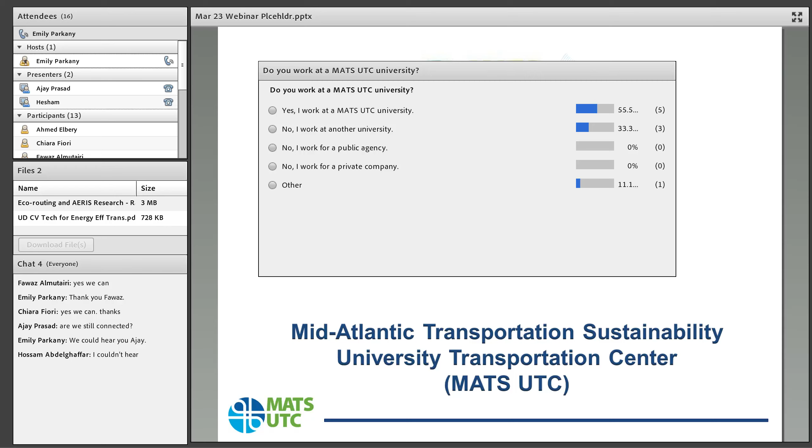So I'm going to go ahead and close that one right now and ask our final question to begin with: whether you work with connected vehicles right now. Let me make sure I'm broadcasting the results. Yes. So many of you guys are working on connected vehicle projects.

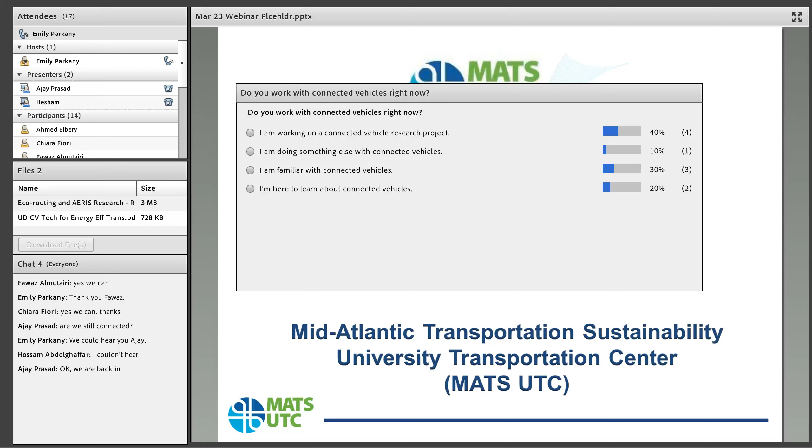So just before I hand it over to Hesham, I wanted to remind us of the other webinars in our series. Today we have our 2 presentations. Hesham from Virginia Tech is going to talk to us about network-wide impacts of eco-routes and route choice behavior and other kinds of environmental ITS applications.

And then I think it's going to be Yongqiang Wang, who goes by John, at Delaware, along with his professor, Ajay Prasad, talking to us about connected vehicle technologies for energy-efficient urban transportation and their project with fuel cell buses in Delaware, which I'm pretty excited about.

We're going to have these on the 4th Wednesday of each month. In April, we're going to have another Delaware project, which is actually a stormwater bioretention cell project, and then a project led by Virginia Tech about a bicycle and pedestrian count program to estimate performance measures in Blacksburg. So I'm excited about that.

In May, we're going to have a LiDAR for air quality measurement project, with a group of electrical engineers at Old Dominion largely working on that. And then we're going to have a UVA and Virginia Tech project in June on the impact of climate change and sea level rise on stormwater design and recurring flooding problems.

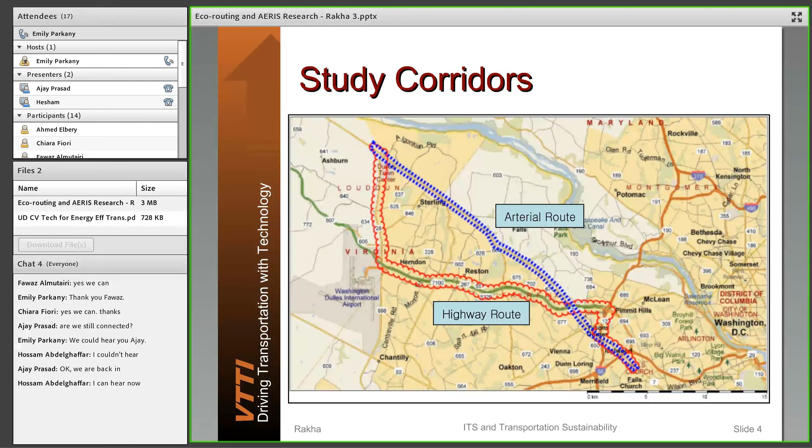So in terms of the characteristics of these routes, basically the travel time on the highway route was around 25.5 minutes. The travel time on the arterial route was about 30 minutes, so it was about 4 to 5 minutes longer to take the arterial route. And basically the standard deviation of the travel time was a bit larger on the arterial route compared to the highway route. However, if you look at the distance traveled on each of the routes, the distance on the highway route was around 22 miles. It was only 17 miles on the arterial route, so it was about 5 miles shorter if you took the arterial route.

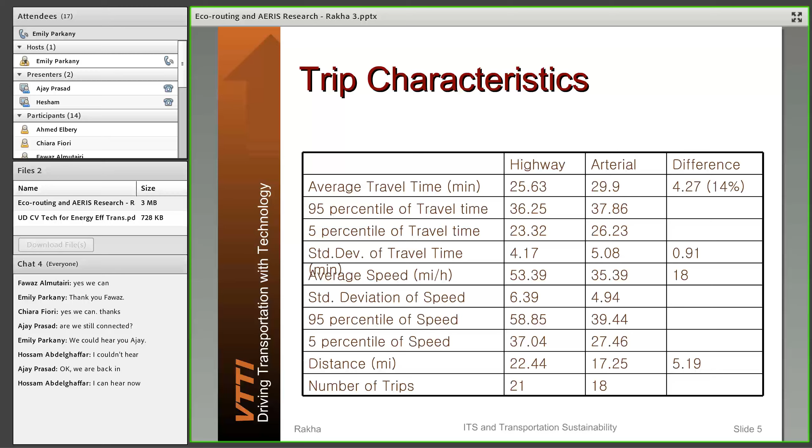What Kyoungho did was each day he would leave at the same time and basically flip a coin and decide which route to take. We had 21 realizations of the highway route and 18 realizations of the arterial route. And then using that data, we actually had a GPS unit on his vehicle which recorded second by second speeds. From that we could compute the accelerations, and then from that we could compute the fuel consumption and emission levels for each trip using the VT-Micro model, which is shown here on this slide, which is a statistical model.

It entails 32 parameters for a specific vehicle, 16 parameters when the vehicle is either accelerating or cruising, and another 16 parameters when the vehicle is decelerating. The model was developed using EPA data, and these are the description of the EPA data that we use to develop the models.

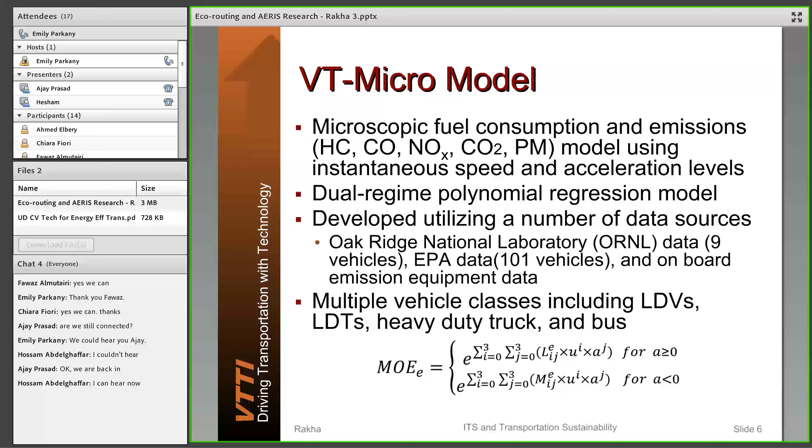So using the VT-Micro model, in order not to bias our results and remove the effect of a specific model, we actually ran it with a number of models. One of them was VT-Micro. One of them is the CMEM model, which is a model developed at UC Riverside. And both models seem to indicate that for this specific trip, you are better off using the arterial route, which was the shorter distance one, but the longer travel time route, compared to using the highway route.

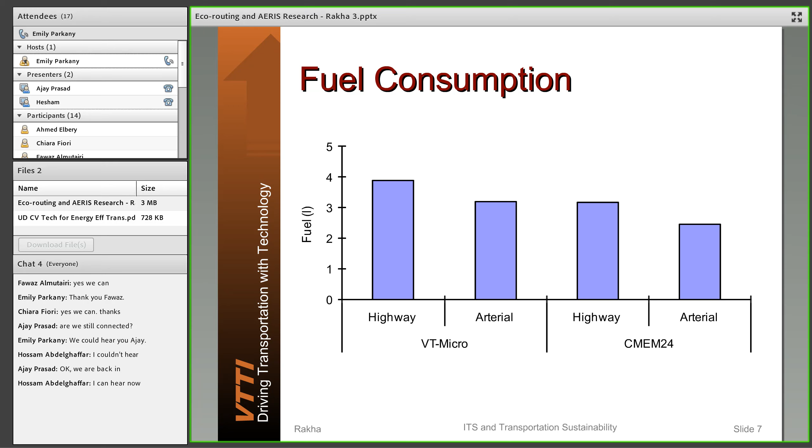The other thing that we found is that if you used MOBILE6, which is a more macroscopic model developed by EPA, it would give you the opposite conclusion. It would tell you that you are actually better off using the highway route if you're looking at HC emissions than using the arterial route. All the microscopic models, and those are VT-Micro, MOVES, which is another EPA model, and CMEM, all said the different conclusion. So based on these results, what we can conclude is that if you use a macroscopic approach, you can derive wrong conclusions because you do not capture the vehicle acceleration effects as they travel on a specific route.

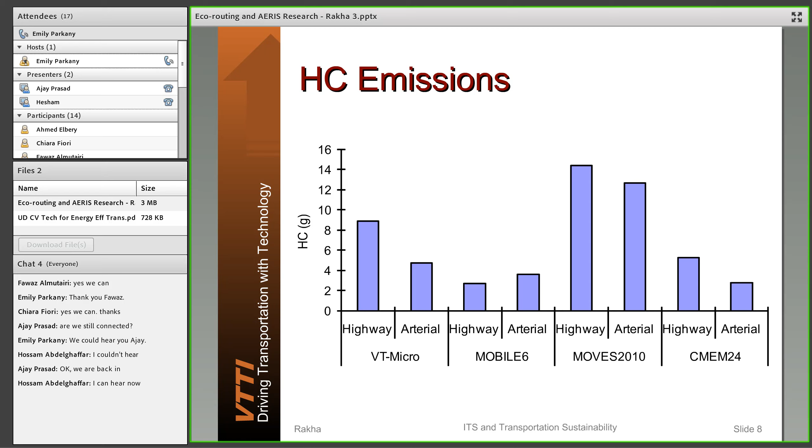The other thing that we found in this study was that if you were to rank the highest fuel consumption and emission events in descending order, so for example, if you were to choose the highest 1% of those events, those would emit 16% of the total trip HC emissions, 19% of the CO emissions, 4% of NOx emissions, 3% of CO2, and consume 4% of the fuel. And so you could then go down for maybe the top 2%, 5%, and 10%.

And basically that is telling you that if we could clip off those aggressive driving events from the driver behavior, we could actually save some significant fuel and vehicle emissions. For example, the top 10%, if we could clip those off, we could save 25% of the total trip fuel consumption. So this ties into the eco-driving. So with that in mind, then we'll jump into what we're doing here as part of the MATS project.

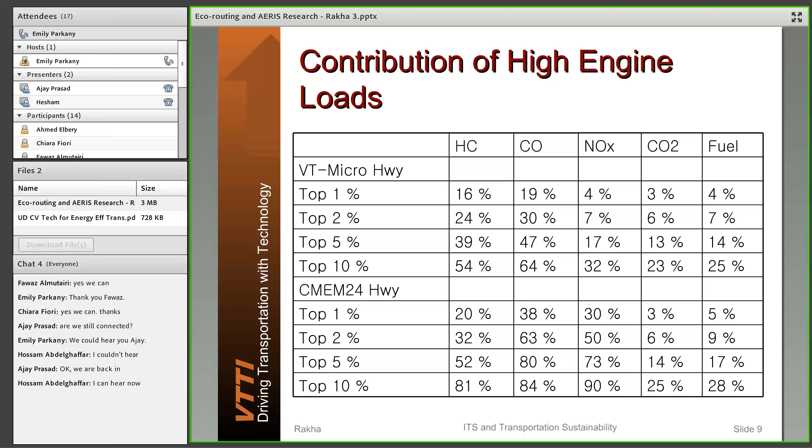So in the previous study that we did, we actually looked at just a single vehicle and how the route would affect its fuel consumption. The question becomes, what if we told now all the vehicles to use the fuel-efficient route? Could we make things worse by sending everyone on the arterial route, and then things would become worse for everyone?

And so these are some of the publications. Initially, the publications were done as part of the TranLIVE UTC, which is headed by Idaho, but then later on, Ahmed Elbery, who's actually on the line, he's a PhD student, extended the work and looked at adding some communication facilities within the INTEGRATION software, and also improving on the eco-routing system using an ant colony based approach.

Okay, so to just give you a brief background of the INTEGRATION software, we have 10 different traffic assignment algorithms within the software. These vary from real-time algorithms to non-real-time, but I'll describe these in the next slide. The INTEGRATION software tracks every vehicle every decisecond, so every 1/10 of a second. So initially we compute the route that you're going to be taking from your origin to your destination. We also identify which lane you should be in, and then we compute what speed you should be traveling at, depending on how close you are to the vehicle ahead of you.

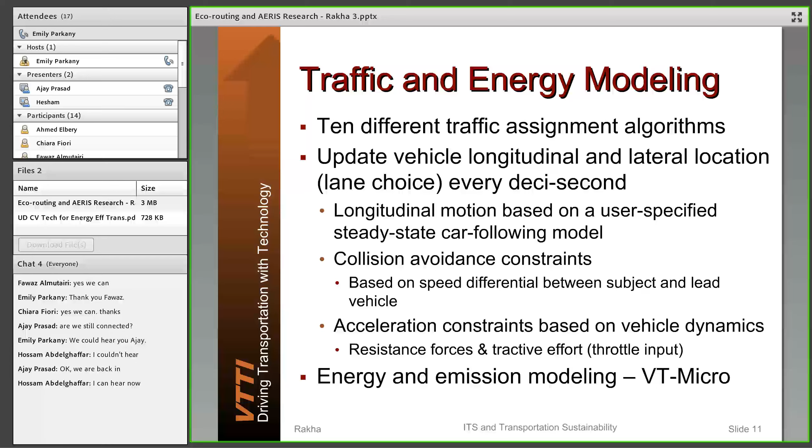In terms of the eco-routing logic that we have in the software, basically it's a feedback system that is based on vehicle connectivity. So we're assuming that vehicles have some connectivity to the TMC. That could be through some wireless communication, either cellular or Wi-Fi. When a vehicle traverses a roadway segment or a link, it reports to the TMC how much fuel it consumed on that link. That information is fused with information gathered from other vehicles that send in their information.

We do some smoothing of that data, and then the routing of future vehicles is based on the fused data that is an amalgamation of all the information that we receive from the different vehicles that can communicate with the TMC. Now this information is vehicle class specific.

So for example, if you're an HOV vehicle that uses HOV lanes, your fuel consumption is going to be different than if you were not an HOV vehicle that would use the regular lanes. And so the fuel consumed for the HOV vehicles is stored in a different matrix than would be for the SOV vehicles. The same thing could be for trucks. The same thing could be for buses and so forth.

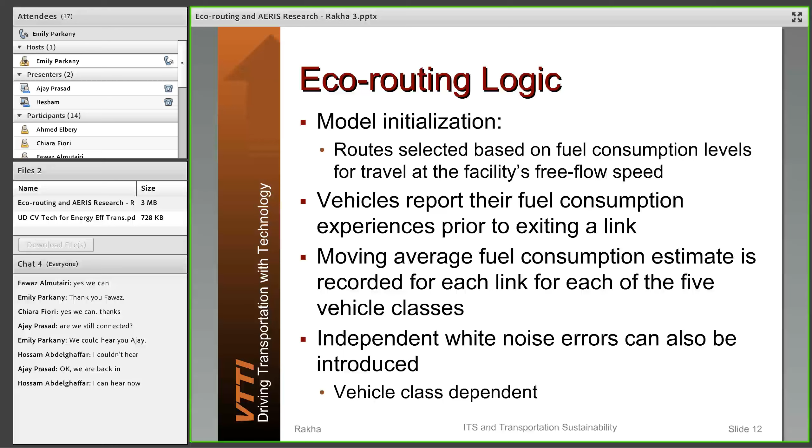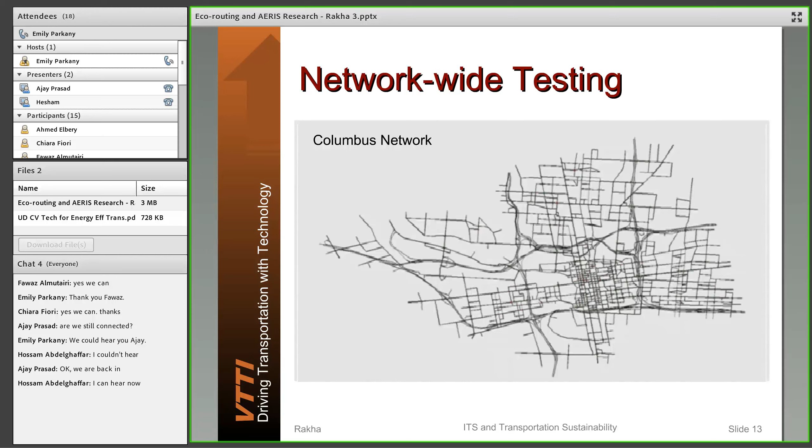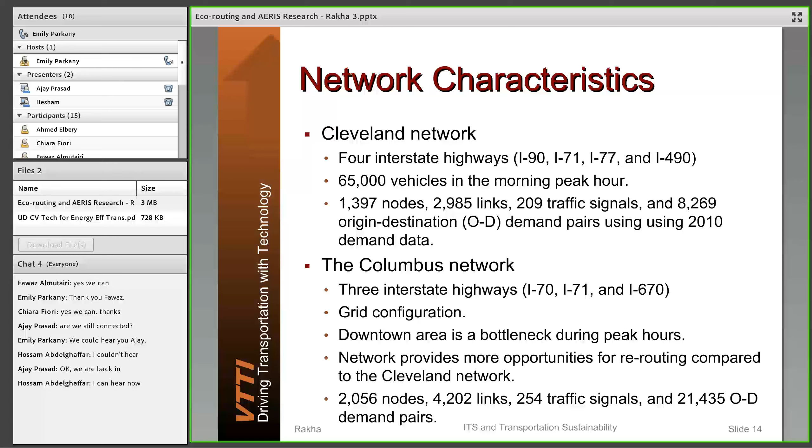And the next slide will just show you some specific information about these networks, but it will be sufficient to say that basically for the Cleveland network, we were modeling around 65,000 vehicles. This was the AM peak, 1 hour in the AM peak, and we had calibrated this network to loop detector counts using a synthetic OD estimator and using some planning ODs that we got from a planning model that they had for the network.

The results for both networks show on the x-axis here the level of market penetration of vehicles that route themselves to minimize their fuel consumption, and on the y-axis is the average fuel consumption. But the key points here are that we observed reductions in the fuel consumption of the network somewhere between 3% and 9%, with increases in the travel time somewhere between 3 to 5% when we routed the vehicles to minimize their fuel consumption. As the level of market penetration of these eco-routing vehicles increased, the fuel consumption benefits increased, which was a good conclusion.

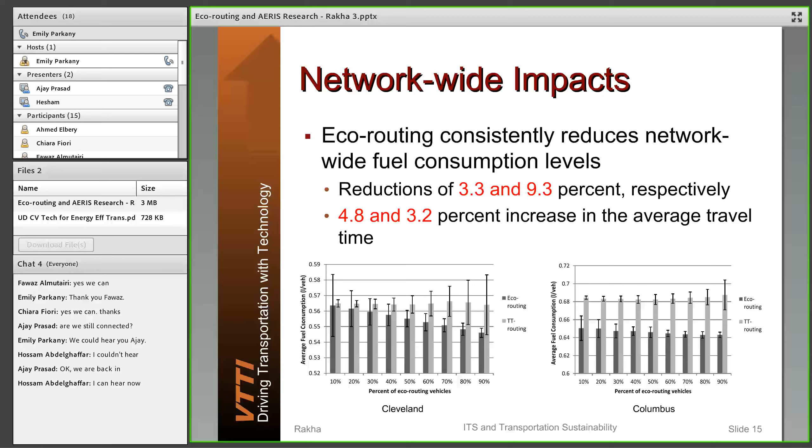And these were observed for both the Columbus network and the Cleveland network. We observed more benefits for the Columbus network, where we had more opportunities to route the vehicles because the topography of the network provided that for us. We also tested the results when we varied the level of congestion, so we increased and decreased the level of congestion. And the key finding was that for higher levels of congestion, we typically seem to observe better benefits in terms of the eco-routing system, which is a good conclusion as well.

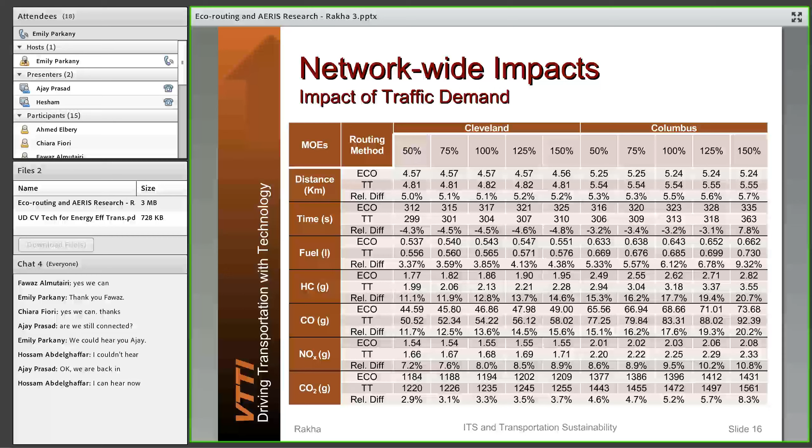We also tested the results for different vehicle types, whether they were fuel-efficient vehicles or non-fuel-efficient vehicles. And again, we found that the results were better when we were routing non-fuel-efficient vehicles.

As part of the Mid-Atlantic UTC, basically Ahmed, who's a PhD student here at Virginia Tech, extended the routing algorithm within the INTEGRATION software by developing what we call an ant colony optimization technique. And basically, in a nutshell, we enhanced the model in two ways. One of them, as I mentioned before, is that the information that we send to the TMC was only updated when a vehicle traversed the entire roadway segment. With the ant colony technique, we allowed the algorithm to update the TMC even when the vehicle was still traveling along a roadway segment and had not reached the end of that segment.

And we would project what would be the total fuel consumption on the entire segment based on how much it consumed on the portion that it traversed at that point in time, assuming that it would continue at the same rate for the entire link. And so basically using the ant colony techniques, we could actually update the information more frequently, and this becomes more critical when you have an accident, for example, on a roadway segment that basically blocks the traffic from traversing that roadway segment.

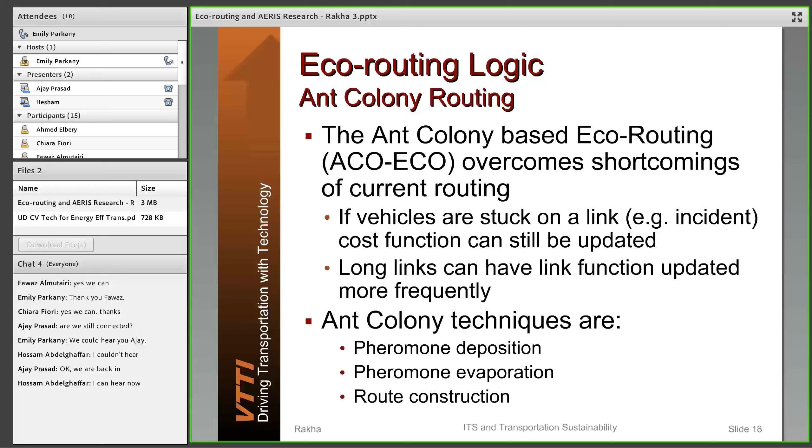In the old version of our routing algorithm, there would be no updates to the information, and so basically the vehicles would not be able to use what the other vehicles encountered up to that point in building their minimum path trees. And so with this enhancement, they could do that. And we found by comparing this enhancement to the model that we showed before, we could get savings somewhere between 2 to 6% that increased as the traffic demand increased on our network.

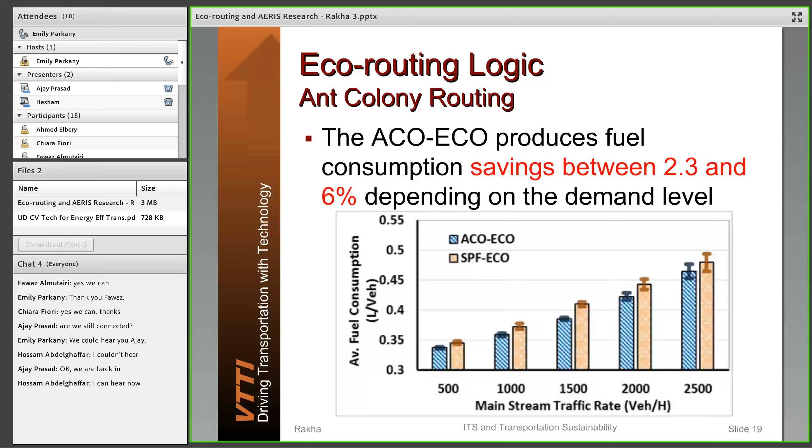Another thing that Ahmed did was he integrated the INTEGRATION software with communication software. So in the INTEGRATION software, we assume that if a vehicle wants to communicate with the TMC, there are no bottlenecks in the communication system, there is no loss of packets of the information between the vehicle and the TMC,

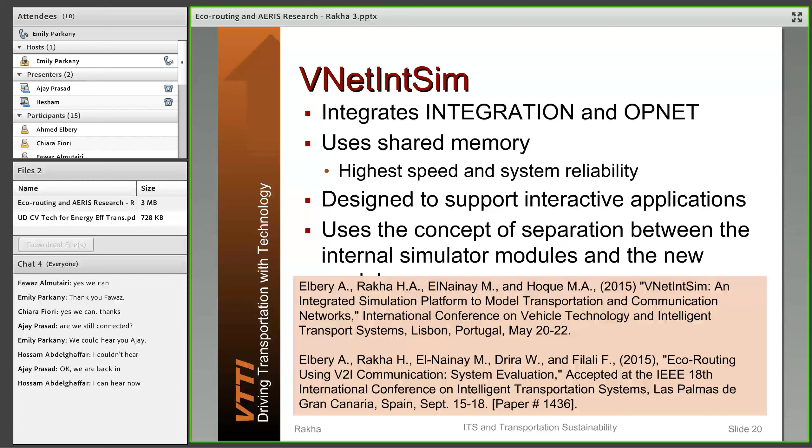and so we tried to get a realistic modeling by using the OPNET communication software and integrating that with INTEGRATION software, and then capturing any losses of packets that would occur when you have a lot of packets being sent between the vehicle and the TMC, and any delays in the communication system that would occur when you have congestion in the communication network.

That would delay the information that gets sent to the TMC, and so then the TMC would only be using data that would be delayed, or if the data were lost, then it would not be using that data.

Now, the algorithm that we have is based on a feedback system rather than a predictive system. So basically, you build a route from your origin to a destination, and then as you travel along that route, if traffic conditions change, we could reroute you at any decision point along that route.

Another thing that we could do is predict what the traffic conditions would be into the future, and that is some of the work that Dr. Mecit Cetin at ODU is working on, coming up with predictive algorithms. He's using probe data to predict what the future conditions of the network would be, and these are some of the initial results that they have from ODU, but hopefully in the future we can discuss these results in more detail.

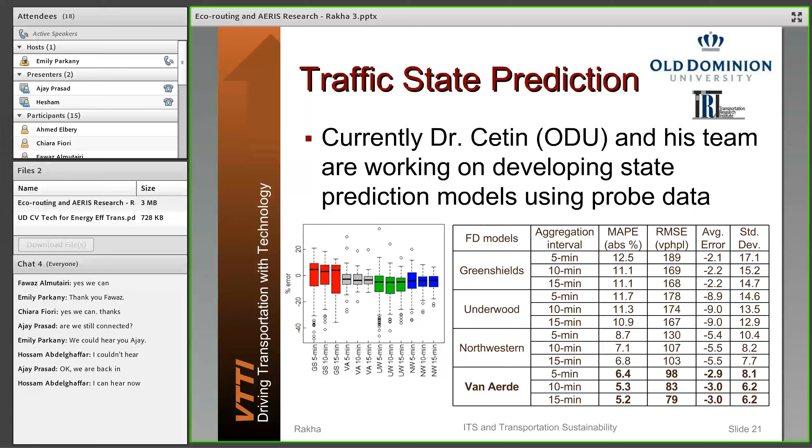So that ends the section on the eco-routing and gets into the next section, which is on the eco-cooperative adaptive cruise control systems, both on freeways and on arterials. We did, as previous work, do work on the freeways.

However, I see that I'm running out of time here, so I'm just going to maybe not describe this one very much, but just to say that basically we use a dynamic programming algorithm that looks ahead on the roadway, so it looks at the topography of the roadway. So for example, if you're driving on a roadway that has a downhill followed by an uphill, then you might speed up on the downhill to get some momentum when you're negotiating the uphill in order to minimize your fuel consumption.

The driver of this system not only inputs a desired speed, but also inputs a minimum speed that they're willing to accept and a maximum speed. And using dynamic programming, we try to find the optimum trajectory of the vehicle to minimize its fuel consumption in such a way that it is as close as possible to the desired speed and within the range of the minimum to the maximum speed.

And this is our objective function here, which is some function of the fuel consumption, some weighting that we want to be as close as possible to the reference speed, and basically we want to minimize the number of gear shifts that the vehicle has to do in order to attain that speed.

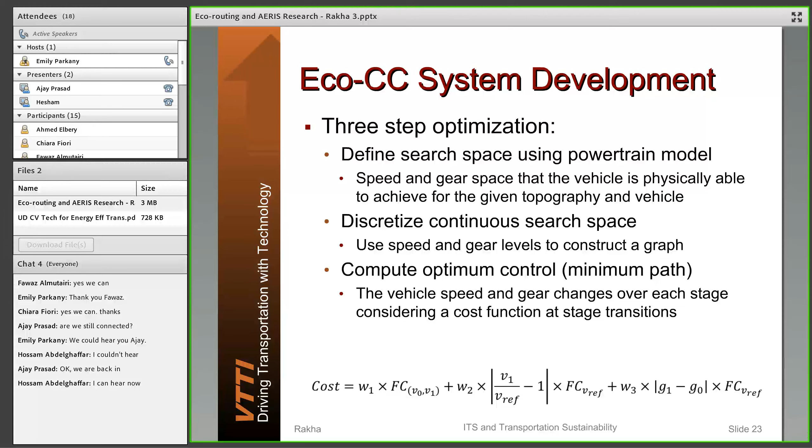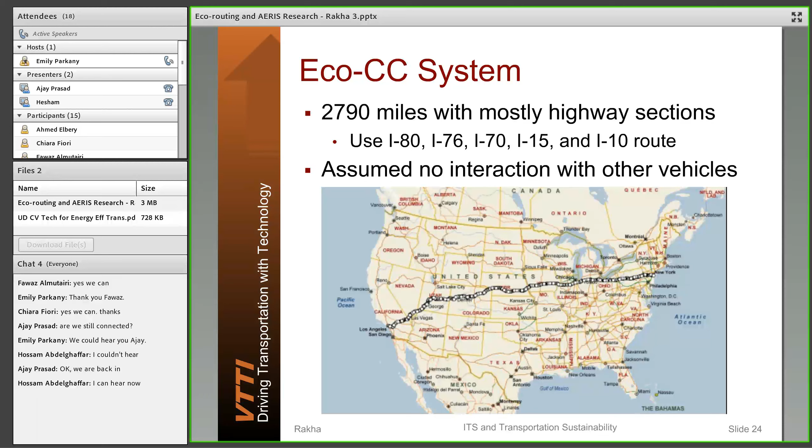We tested this on a trip from New York City all the way to Los Angeles, which is about 2,800 miles long, in MATLAB. We assumed that there were no other vehicles on the roadway, and basically we tried to minimize its fuel consumption to get from New York to Los Angeles.

We observed that we could get benefits in fuel consumption somewhere in the range of 10% if you're looking at a Toyota Camry, around 17% if you're looking at a Chevy Tahoe. However, you're going to incur additional delay and reach your destination 7% longer for the Camry versus about 8% longer for the Tahoe.

So if you want to get there on time but still minimize your fuel consumption, you can get around 5% savings of fuel consumption and arrive there on time, and around 9% savings of fuel consumption for the Chevy Tahoe, and arrive there on time.

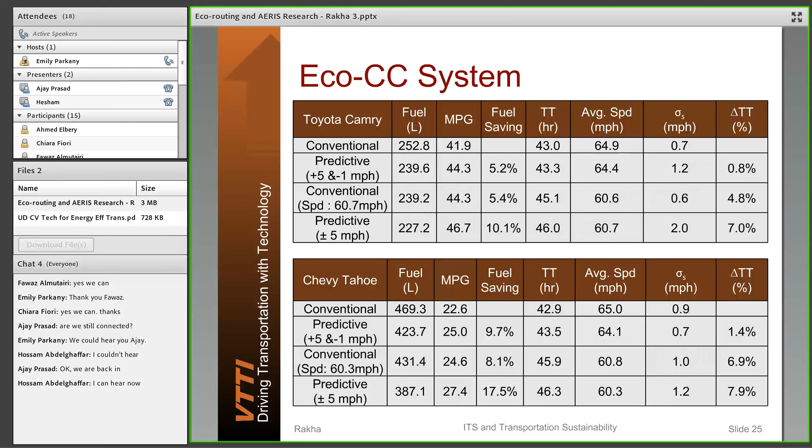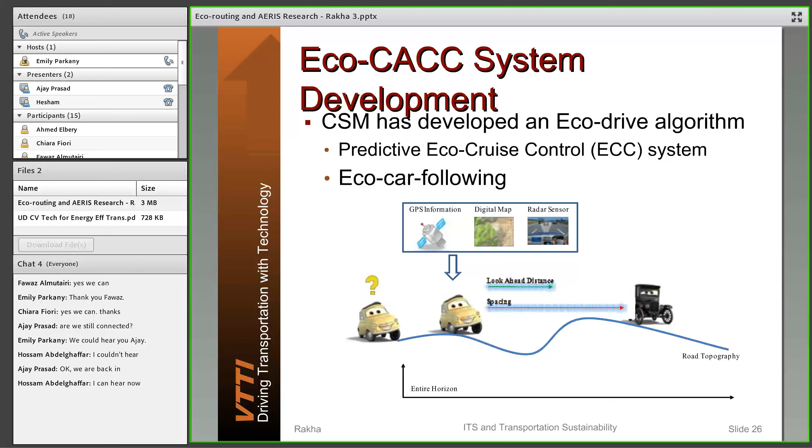Now, if you have other vehicles on the roadway, you need to also consider car following behavior, and we extended this to look at not only a cruise control system, but we made it into an adaptive cruise control system where it would actually look at the vehicle ahead of it.

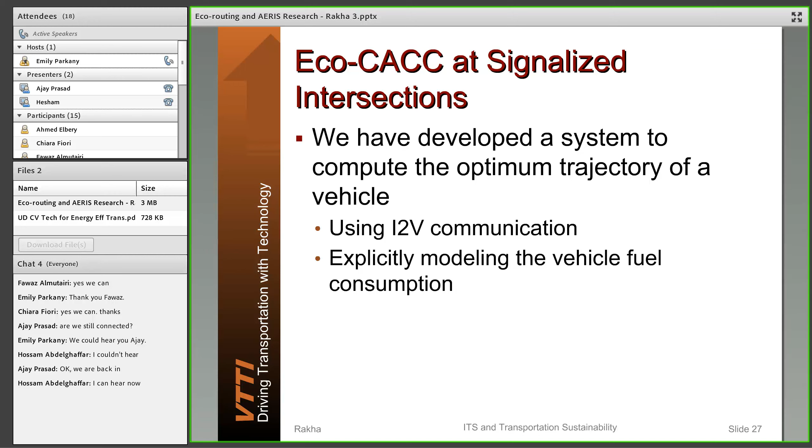Now I'll jump into the work that we're doing in terms of the Eco-Cooperative Adaptive Cruise Control System. Basically, the system that we're developing here assumes that you have some communication between the vehicle and the infrastructure. The infrastructure can inform the vehicle of what we call SPaT, which is signal phasing and timing information. We're looking at a scenario where a vehicle is arriving at a traffic signal that is red and will be turning green sometime in the near future.

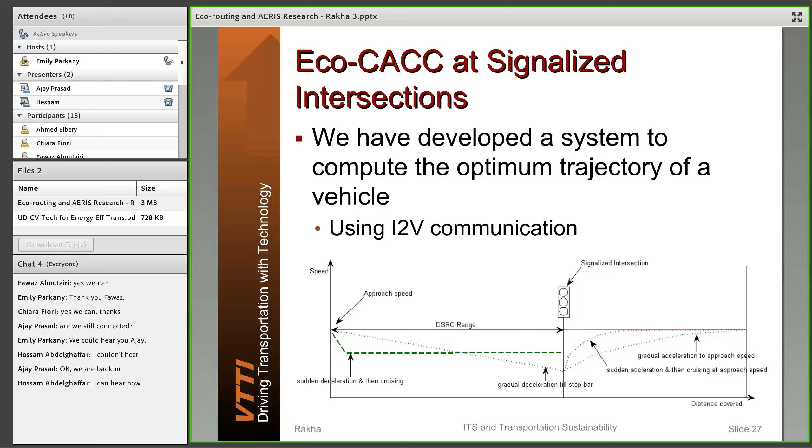And so if that controller could tell the vehicle that I'm going to be turning green in, say, 10 seconds, and if I knew that there were 3 vehicles in queue at the stop line, then I know I need to delay this vehicle by about 20 seconds. And the question that we're trying to answer is, how can we delay this vehicle in a fuel-efficient manner in order to minimize its fuel consumption?

So in this slide here, we show you the trajectory of vehicles of drivers who are uninformed, and what we want to do is change those trajectories to be these red trajectories where the vehicle would slow down upstream in order to incur the same delay, but in a fuel-efficient way so that it arrives at the stop line just as the last vehicle in queue is departing from the queue.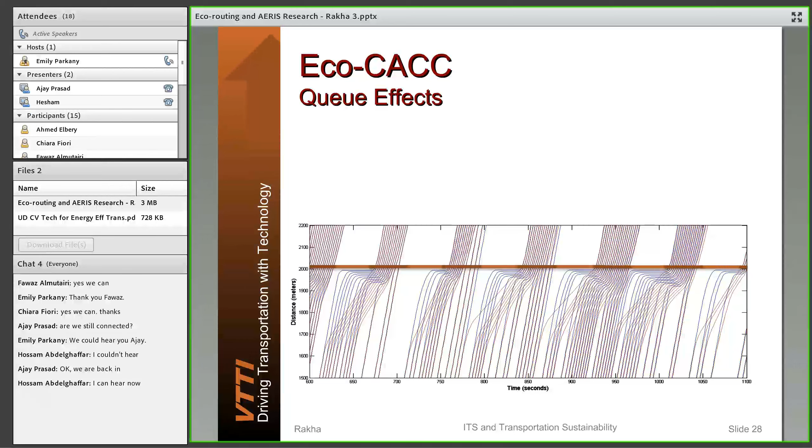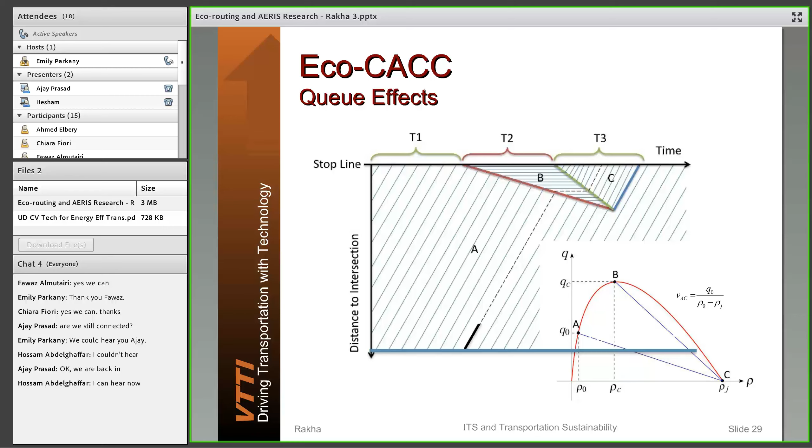And in order to do that, what we have to do is predict when the queue is going to be discharged. So we came up with techniques to estimate when the queue will be discharging in order to compute the delay that we need to delay you by in order to have you travel through the intersection in a fuel-efficient manner.

So in this slide here, we just show you the normal driving. Then we show you the Eco-Cooperative Adaptive Cruise Control driving if we do not consider the queue. And then we show you the same behavior if we were to consider the queue prediction that we developed.

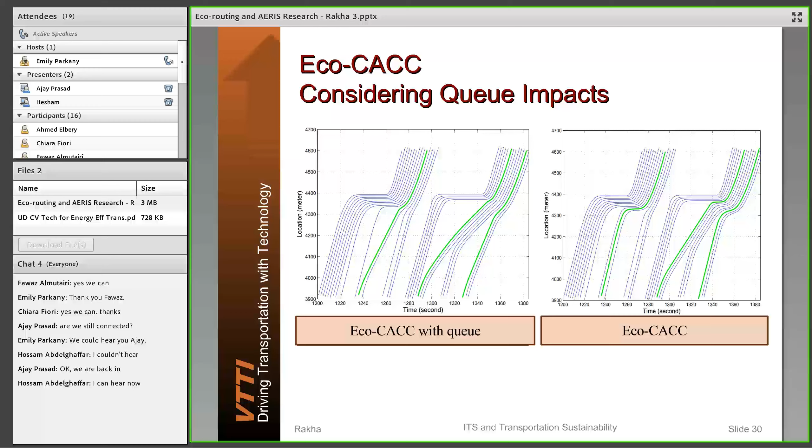The red line shows you the benefits without the queues, and then the green line shows you the benefits if you were to predict the queues. So you get better benefits if you were to incorporate the queue prediction in your model.

Now, we also tested it on a 2-lane approach, so 2 lanes in each direction. And so basically in this case, vehicles can overtake the vehicles that we are controlling. And what we found in the 2-lane approaches is that until you get a level of market penetration of around 25-26%, by having the system running, you actually get disbenefits, around 5% disbenefits in the fuel consumption.

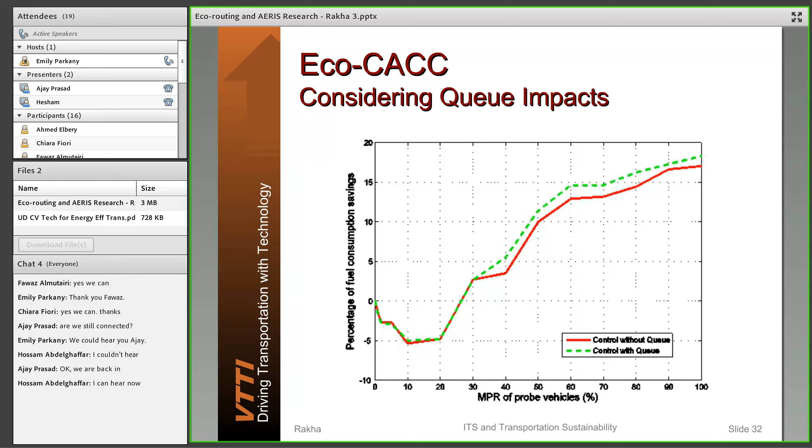And that happens because the other vehicles see the vehicle is trying to slow down and they don't understand why it's slowing down so early on. They are more aggressive drivers, and so they overtake and then cut in front of that vehicle. So overall, the system actually has higher fuel consumption levels, but then as the level of market penetration increases and the vehicles are forced to follow these Eco-CACC equipped vehicles, then you actually get benefits in your system.

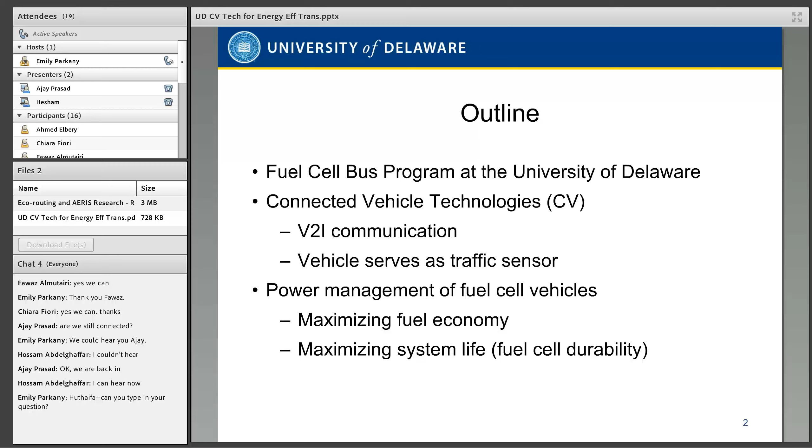Okay, so a quick introduction to our fuel cell bus program at the University of Delaware. It's an ongoing program commenced in 2005. We currently have 3 fuel cell buses on our campus, which we use to transport students from their dorms to the classrooms. Bus 1 was introduced into our fleet in 2007, Bus 2 in 2009, and Bus 3 in late last year, 2015.

The bottom right there shows our refueling station. This was built by Air Liquide, just about 5 miles away from campus. It's maintained by Air Liquide, so that's where our buses go to refuel as and when required. The hydrogen fuel tanks are in the roof of the bus. You can see the hump on top of the roof. That's where the hydrogen tanks are located. And the entire fuel cell system, if you open the back doors, you can actually see the entire system right in front of you there. I don't have a picture of it, unfortunately.

Importantly, all of these vehicles are fully equipped with all kinds of sensors, as well as a GPS tracking unit. And in real time, this information is collected by a server in our lab using a cellular link. And so we have many years of data that we have archived, and we are now using that historical data to test some of our optimization algorithms.

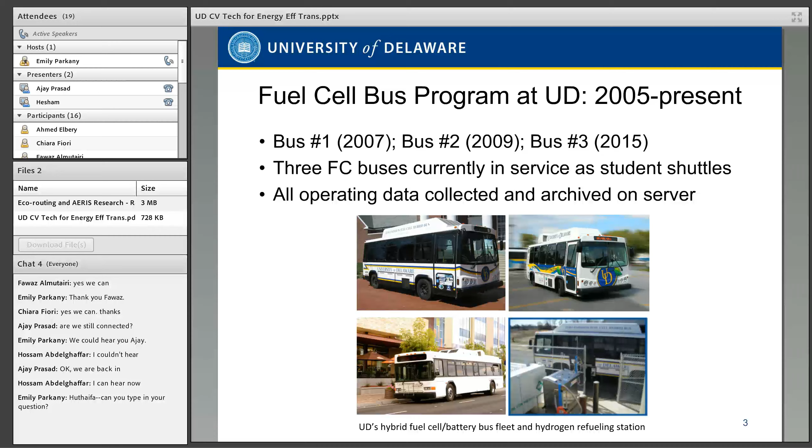Okay, so what exactly is a fuel cell? So the picture, the schematic on the right, tells you how a fuel cell works. So the fuel in this case is hydrogen. We use very high purity hydrogen as the fuel to the system. So the fuel comes in at the top left, and it undergoes an electrochemical reaction, and the excess fuel exits at the bottom left.

The electrochemical reaction is between hydrogen and oxygen. The oxygen is extracted from the air, so we supply air with an air compressor to the fuel cell stack at the top right of that picture, and as it flows, the oxygen is extracted and the excess air flows out through the bottom right.

The beauty of this entire process is there is no combustion going on here. This is not an internal combustion engine. This is not a heat engine. Therefore, the efficiency is not limited by typical Carnot cycle efficiency considerations. This is an electrochemical reaction where the chemical energy contained in the hydrogen fuel is directly converted to electrical energy, and we can use that current and that voltage to drive the traction motor on our bus.

So what is the product of the reaction between hydrogen and oxygen? It's just plain old water, and what comes out of the tailpipe of the fuel cell vehicle is just water vapor. On a cold morning, you might see water droplets, but there is no carbon dioxide, no carbon monoxide, no NOx, no SOx, no soot, nothing.

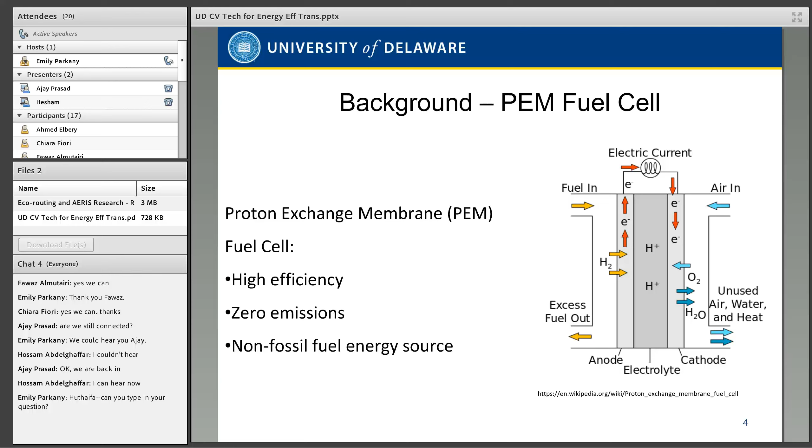So on the left there, I have a couple of bullet points about the benefits of fuel cell vehicles. Because it's not a heat engine, you get very high efficiencies, about 2 to 3 times the efficiency of a conventional gasoline or diesel powered vehicle. Also, these vehicles are zero emission because all that's coming out the tailpipe is water. And if you produce that hydrogen from a non-fossil fuel source, that's a good thing because that helps to reduce our nation's dependence on foreign petroleum.

Typically, the voltage is not sufficiently high, so we pass it through a boost converter to jump it to 300 volts or 600 volts, depending on what your system is configured for. The voltage coming out of the fuel cell is DC, whereas our traction motor is an AC induction motor, so we have to pass it through an inverter to convert DC to AC, and that's how we drive the traction motor, and that's what drives the wheels.

You'll notice there is a battery that is attached in parallel to the electric drivetrain, and what we have in our bus is a battery-dominant hybrid configuration, which means to say that the fuel cell's job is to work so as to keep the battery topped up, depending on certain rules that we employ, and it's the battery's job to actually drive the vehicles. So the fuel cell and the battery work in a combined manner to drive the vehicle.

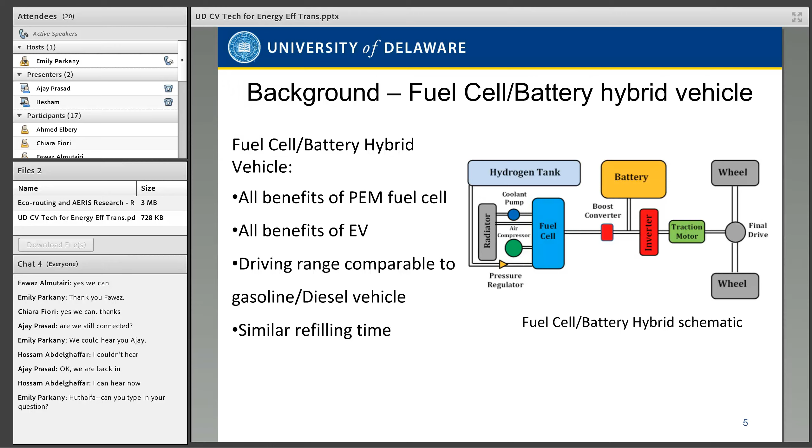So with that, I'm going to hand it over to John, and he's going to talk to you about what he's been doing in terms of his results. Okay. Hello, everyone. This is John from University of Delaware.

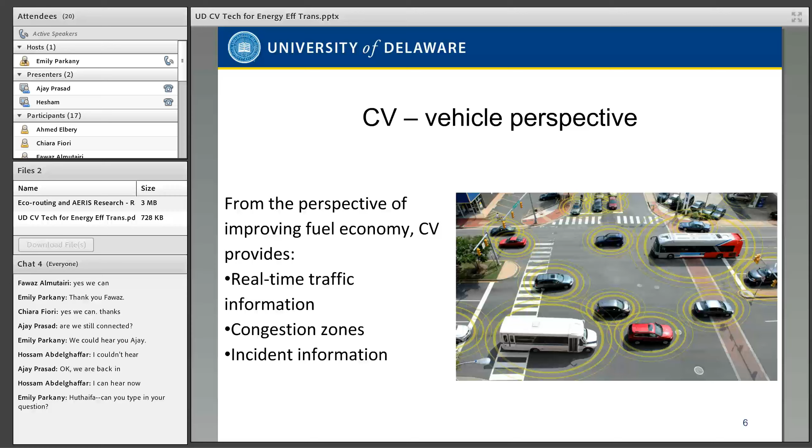So with all those connected vehicle technologies available, we have all the communication systems to get traffic information regarding congestion and incidents for the vehicle. So from the vehicle perspective, we want to use that information to improve fuel economy. And also, as we showed before, from the traffic management perspective, with those connected vehicle technologies, we can send data to the server, to the TMC.

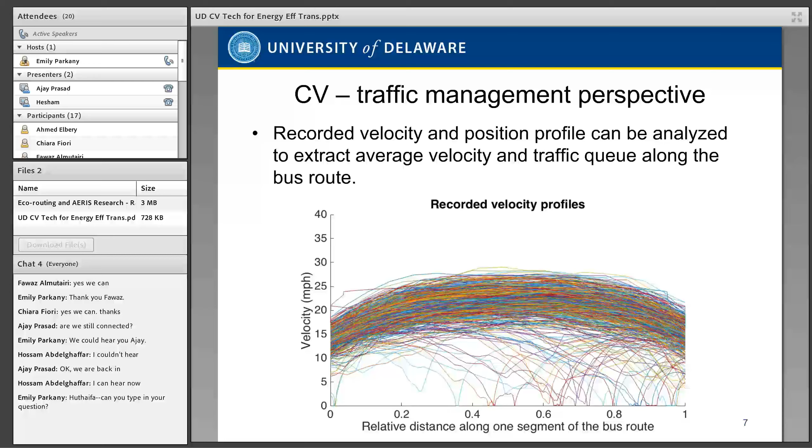So that means with our bus as a traffic sensor, we can extract all the usual information regarding traffic, such as average velocity and length of traffic queuing on the route. That information is very useful from a traffic management perspective. And then after we get all that traffic information from the TMC, how do we use it?

So for the power management on the vehicle, traditionally you only have, say, a gasoline or diesel engine. You only have one power source, and normally the fuel consumption is directly proportional to your power demand: how much you accelerate or your cruising velocity on the highway. But on our hybrid vehicle, it's much more complicated. Normally you have two or more onboard power sources. In our case, we have a fuel cell stack and a battery pack.

So to improve the system efficiency, it's not just proportional to the power demand. It also depends on the state of your power sources, such as battery state of charge or the power level from the fuel cell stack, because each power source has a different efficiency curve. So the prediction of the future workload is very useful when we are trying to maximize the fuel efficiency of the whole system. And later I'll talk about the system life for the fuel cell stack specifically.

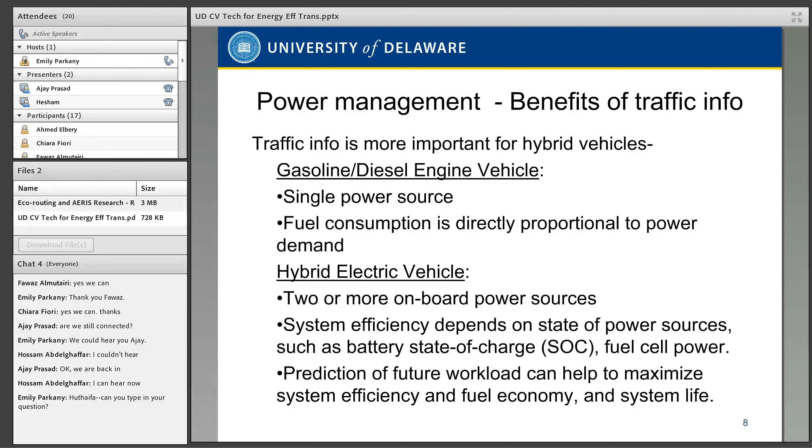So with all those parts working together, we have the framework of the control system. On the right, we have the detailed physical vehicle model. For our bus, we have a fuel cell and a battery to drive the motor. On the bottom left, we have all the information we can possibly get from the TMC, such as traffic information and geographic information, such as road elevation. That information can easily be converted to the velocity profile, including delays and slope of the road. Then it can be fed into our optimization algorithm, which will convert those velocity profiles to workload.

And normally for different vehicles, you have different optimization objectives. Traditionally for gasoline engine vehicles, you only consider fuel consumption and emissions. For the fuel cell stack, we don't have emissions, so that's good, but we do consider fuel consumption. In addition, we also have to consider durability of the fuel cell stack. Because as Dr. Prasad just said, the fuel cell stack does not like frequent on-off cycles. It puts a lot of stress on the fuel cell and decreases its lifespan. So we also add durability to the cost function as another objective.

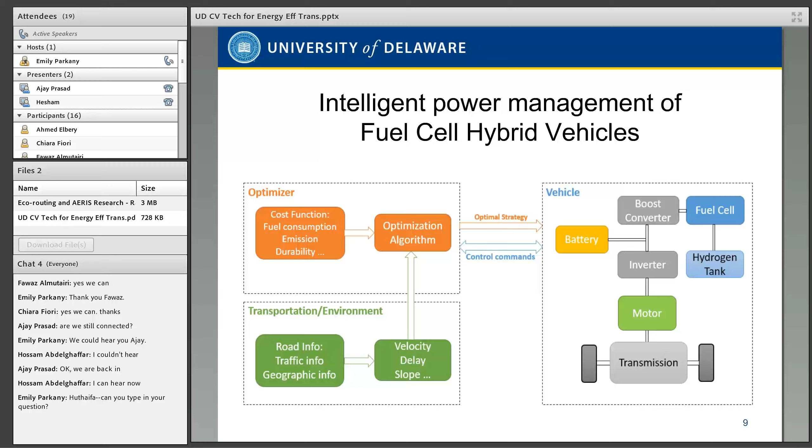So here is one of our main results. On the top you can see the optimal battery state of charge trajectory. In the middle you have fuel cell stack power. And on the bottom you have accumulative fuel consumption.

The blue line here corresponds to the traditional rule-based controller, where the system will turn the fuel cell stack on when your battery SOC drops to a certain level. In the middle, you can see for the rule-based controller it will turn the fuel cell stack on later in the drive cycle, and then it will turn on and off relatively frequently to maintain the lower SOC limit.

The orange line shows you the result from optimization. If the system knows the future load, in this case for a 2-hour drive cycle, it will try to turn the fuel cell on beforehand and operate at a relatively optimal efficiency region, so that the overall fuel consumption for the whole drive cycle will be smaller than the rule-based control strategy.

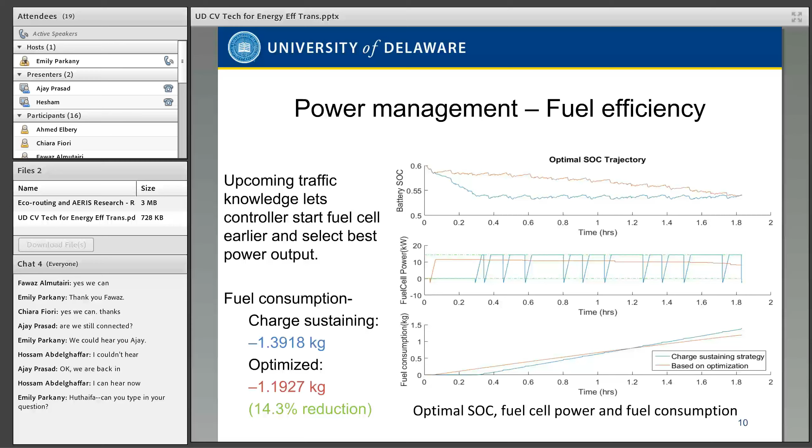We also mentioned fuel cell durability in the previous slide. Right now cost is still a major barrier for the commercialization of fuel cell vehicles. Although all the automakers are trying to release their fuel cell vehicles, they're still relatively expensive. So we want to add durability as an optimization objective to our algorithm, because this is the same drive cycle from the previous slide. On the bottom, for the rule-based controller, the blue line, you turn the fuel cell stack on or off very frequently.

On-off cycles put a lot of chemical and mechanical stress on the fuel cell stack. Chemical stress is due to the high startup chemical potential when you turn on the fuel cell. Mechanical stress is because the membrane inside the fuel cell will swell when it's working and shrink when it's drying, when it's not working. So we want to add the on-off cycles as a penalty to the cost function.

As you can see here, the orange line shows the optimization result, where the fuel cell stack will turn on early, and then it doesn't have to turn off during the whole drive cycle. So that's very, very good for durability.

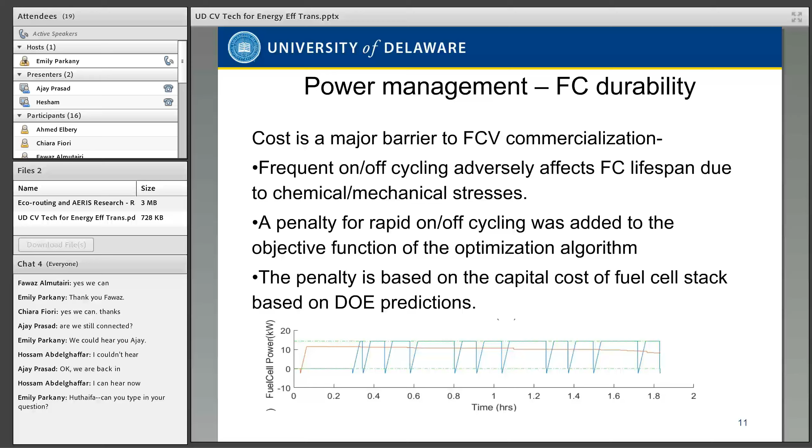The ongoing research is focused on the real-time controller. We also use the optimization algorithm, as Dr. Hesham just said, the dynamic programming algorithm. As we know, it will be relatively slow when you have to consider the state of the power source. For a traditional gasoline engine, your state space will only be velocity and gear ratio, maybe. So your state space is relatively small.

But for a hybrid vehicle, now you have fuel cell power as your control space. And for the state space, you have battery SOC, velocity, everything. So the control and state space will be much larger, and it's relatively slow. So how do we implement it in real time if we can get real-time traffic information? The current research focuses on building a neural network learner.

Basically, we get the optimal control strategy from previous dynamic programming algorithms. We feed those optimal trajectories, optimal control strategies, to the learner. The learner, based on the current state of charge and future workload, will give you the optimal control strategy for the vehicle, and it can be implemented in real time after you train the learner.

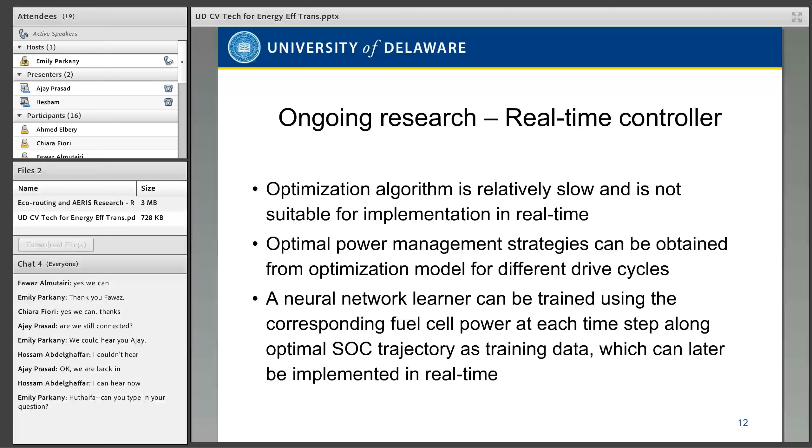And then our bus 3 was just delivered late last year. The power management system on bus 3 is capable of being controlled remotely. Right now it's communicating with our server through the campus Wi-Fi, and the server can send upcoming traffic information to the vehicle. Then the vehicle will use that information to predict the workload, and use the real-time controller to optimize fuel efficiency as well as system durability.